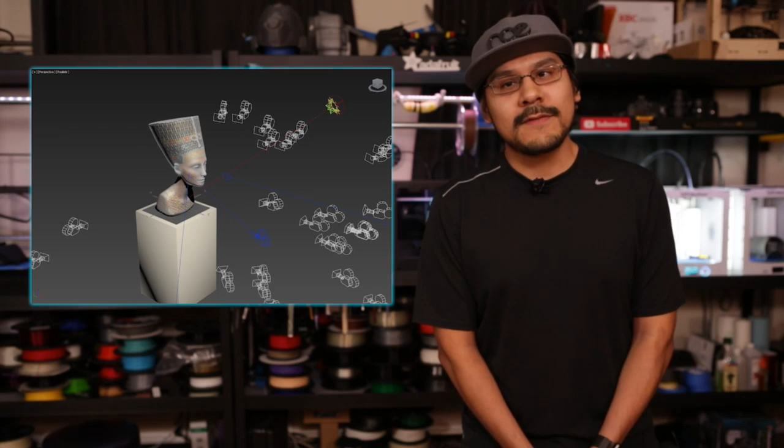So 2 artists secretly 3D scanned the bust and released the files to the public as a free download. Although museums have already scanned Nefertiti's bust, they don't plan to make it public, which seems kind of backwards because there are a lot of museums around the world hosting scan-a-thons, where they let people use their smartphones to take a bunch of pictures of objects to make 3D scans of them.

As a way of bringing her back to Egypt, the 2 artists 3D printed a 1-to-1 copy, which is like the most precise replica ever made. That bust now resides in the American University of Cairo. This is like pirate 3D printing, folks.

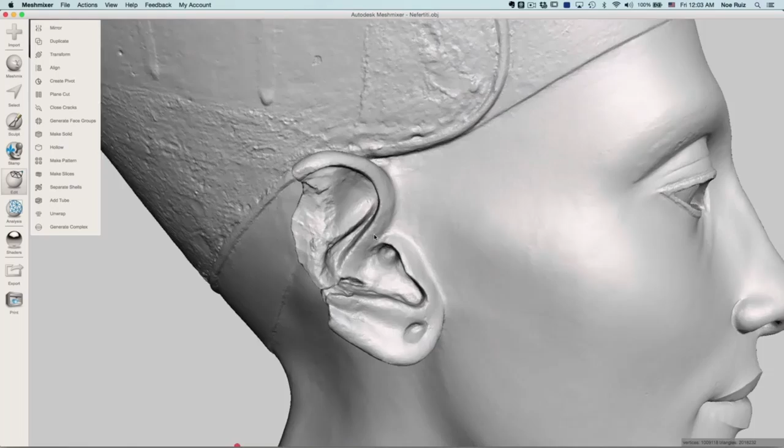So we thought we would download the file and 3D print it ourselves on our 3D printer. We're amazed just how much detail was captured in the model. Every little crack, chip, and scratch is fully visible, which is no surprise because the mesh has a whopping 2 million polygons. It's so detailed that if you throw it in your slicing software, it'll probably crash if you try to print it as is.

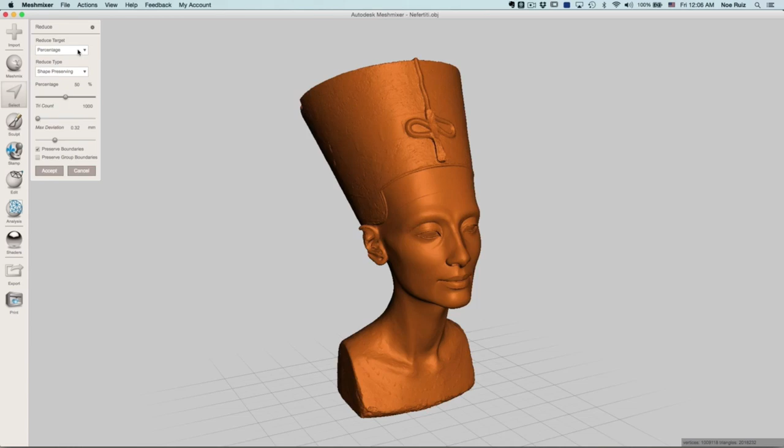So we used a program called Meshmixer, from Autodesk, and reduced the polygon count to 50% and did a little tweaking so it's better for printing on an FDM style 3D printer like we have here in the back. We chopped off the bottom so that it's completely flat, which makes it a lot easier to print, especially without a raft.

We also hollowed it out and cut off the top because we think it would make an epic planter. Plus it will save a lot on printing time and material, so that's always a good thing.

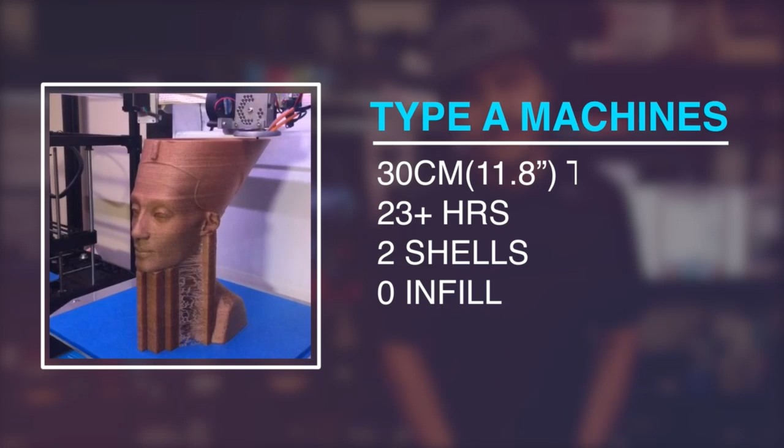So we used the Type A Machines Series 1 3D printer and scaled it to the max. That's a massive 30 centimeters tall. And even as a shell with no infill, it took over 23 hours to 3D print, which actually isn't a lot of time when you think about how long it took to get from Egypt to our studio here in South Florida.

And instead of using typical plastic like PLA or ABS, we actually used a PLA composite mixed with hemp. Yes, you heard it right, hemp, because why not? We're already 3D printing an illegal copy, you might as well go big or go home.

So here she is, fully finished in all her glory. We're just amazed how well it turned out. Really nice details, all the overhangs came out really well, which isn't really easy to do, especially with a large print. A lot of things can go wrong, like you can run out of filament, or the printer could crap out on you halfway through the print, and then you cry for lots of hours.

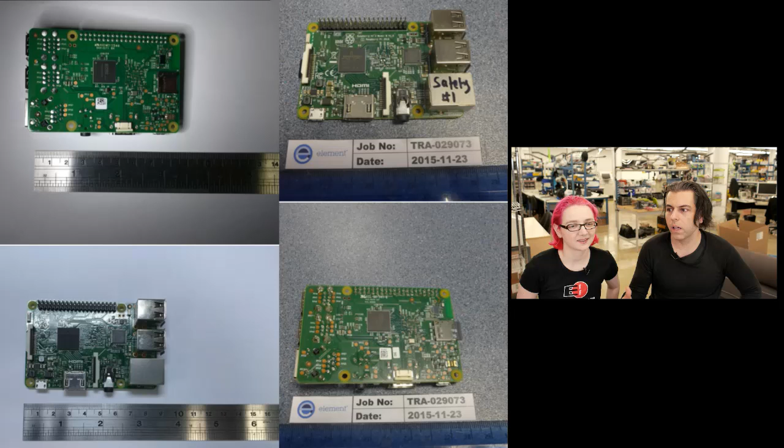There was the FCC document. There's this FCC Twitter account that tweets whatever was registered with FCC, so people were like, ooh, there's a new Raspberry Pi, and then you could follow the links. Because we had our shipment coming and we have a friendship with the Pi Foundation, normally if there were other types of leaks in the technology world, maybe we would cover it. But this one, we have an agreement, we trust each other, so we don't have an NDA or anything. We're actually just friends, we have a friend-DA. They said, hey, can you please let us do the launch the way we want to do it? We never ruin it for anyone. So there was a bunch of leaks that came out, and we just watched from the sidelines.

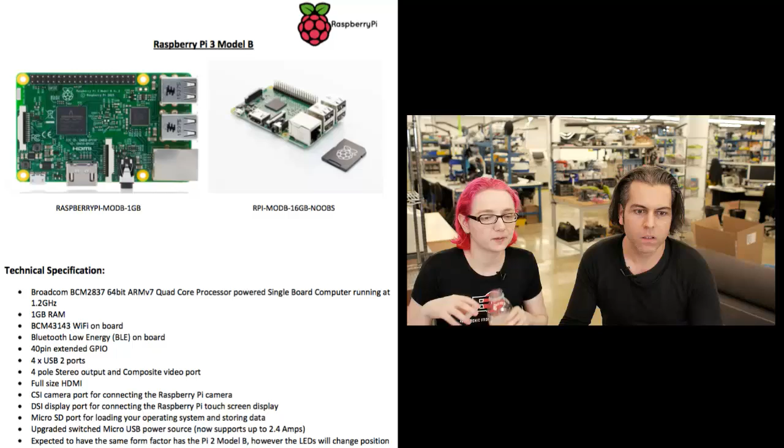And print catalogs, this was from CPC. They have to do things in advance, so the print catalogs hit some mailboxes. And then Farnell and RS both had leaked PDFs, because they have these big, massive e-com sites that have to have content management systems, with like thousands of people, and they're like, oh, I'll just do it the night before. So the first thing that came out was this Farnell PDF, and then that was removed. And then afterwards, this RS comparison PDF, and that was removed. And then a couple photos came out, and it's the Raspberry Pi 3.

And I guess, LADYADA, why don't you just quickly, before we get to new products, which is the Pi 3, tell us what were the big things about the Pi 3 that were interesting? The high level stuff is it's the same shape and size as the Raspberry Pi B Plus and Pi 2, so it's still got that Ethernet port, 4 USB ports, micro USB for power, micro SD card, HDMI, and AV port, but the chip has been updated.

So instead of a BCM 2836, it's the 2837. It's an ARM Core V8 processor. It runs a lot faster, has the same amount of RAM, but basically it's like 50% faster than the Pi 2, so it launches faster. It can run programs and emulate stuff a lot better. You do need to have a new SD card, but you can basically do all the stuff you did with the Pi, but just more. And it has built-in Bluetooth Classic, Bluetooth Low Energy, and Wi-Fi chipset, so you don't need an external dongle for those. It's baked right in, which is why there was an FCC filing.

Okay, so let's get to new products, and then we'll show the Pi 3, and there'll probably be a lot of questions.

Yeah, of course. So let's keep moving along.

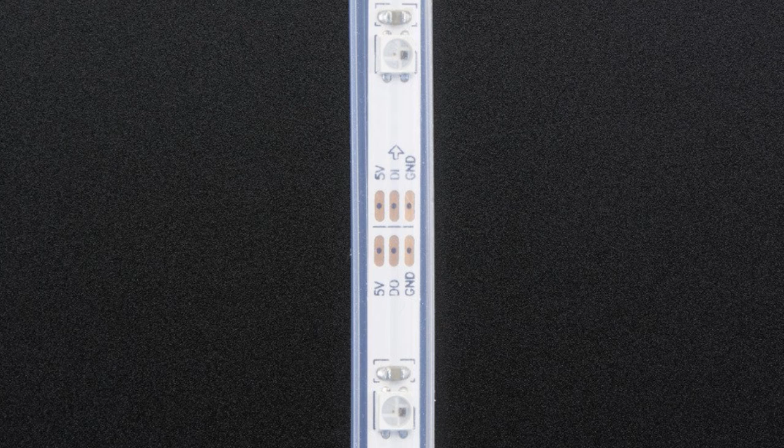These are particularly great for wearables. These are super skinny NeoPixels. If you've seen the mini NeoPixels we've had on the Feather NeoPixel wing, these are much thinner than normal NeoPixel strips. Instead of 5 by 5 millimeter or 3.5 by 3.5 millimeter NeoPixels, they're pretty much the same brightness. I didn't notice a significantly less bright effect. You still have the same code - they're code compatible, just much smaller.

And so the strips of LEDs are also much thinner. We have them at 30 LEDs per meter, and this is the 60 LED per meter. There's also 144 LED per meter, but it's not that much thinner because to get that density, the capacitor makes it a little thicker. So I'm not sure if I'm going to carry the 144s, but the 60 LEDs are much thinner, and I'll show them on the overhead as well.

Can you go to the next photo so I can show that? This is the other one - same basic thing, it's just black flex versus white flex.

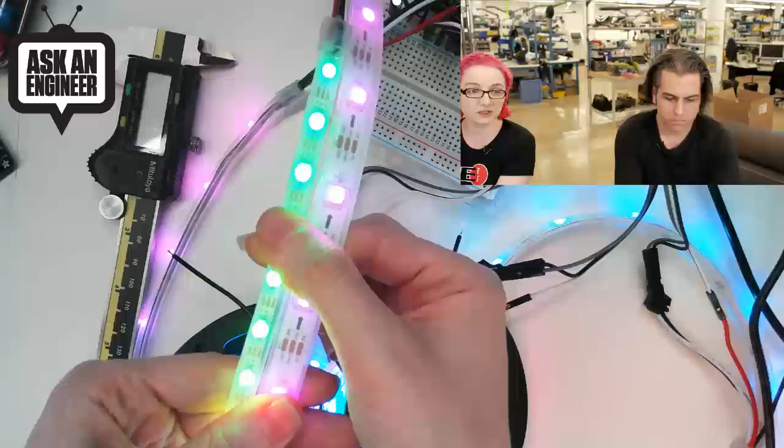Yeah, you can see it's a lot thinner compared to the normal NeoPixels. So this is really good for wearables. I think if you want a really slim effect, or if you want to fit it into some enclosure that's extra small - this is the skinny NeoPixel, and this is normal NeoPixel. So you can really see it's about half the thickness, half the width.

Grabbing my calipers, I'm measuring what's the flex PCB inside of the sheathing - these are really skinny, it's 5 millimeters, and then this one is about 10 millimeters. So it's about half the thickness. Most others actually also focus on being thinner too, but they just stick with 10 millimeter. For these, they really are just about as wide as the LEDs themselves, so only a little bit more - basically 5 millimeters, only a little bit wider than the 3.5.

Uses the same power, same protocol and everything, but just skinny. They're actually basically about the same price too. So if you want, for this it's perfect - I was thinking of doing a jacket with LEDs in it, and this is way better. You get half the thickness, basically the same density of pixels, but much more freedom and flexibility. If you're making an LED wig, these will be a lot lighter as well.

And remember, they have a weatherproof sheathing, but you can cut that off and just strip it to have the raw LED if you want maximum thinness. They're also a little thinner in this direction, but I don't remember the exact number - I think it's maybe 0.1 or 0.2 millimeters thinner, but they're skinny. I like that, it's cute. Yeah, a little tougher to solder too, but whatever.

Okay, and like I said, we have all these videos showing what they're doing - the different densities, 30 and 60 LED per meter. So sweet, and it's hard to tell, but there's black ones and white ones. Basically we just have both types, since people want half of one, half of the other, so we just carry both.

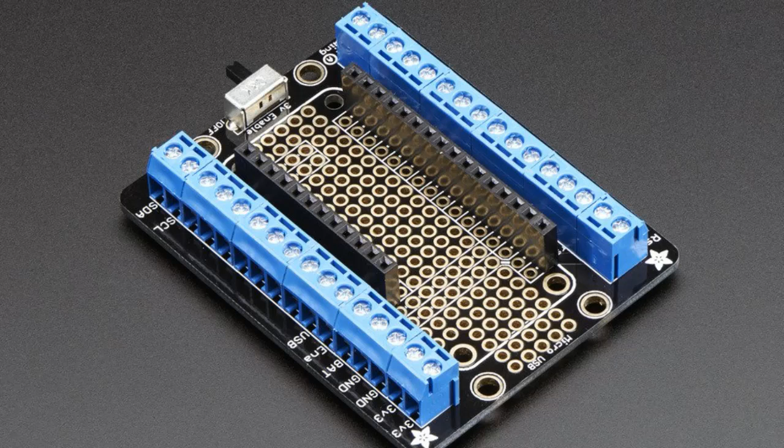Okay, next up - this is a feather accessory. I just love having a feather accessory every week, and this week's feather accessory is a terminal block wing.

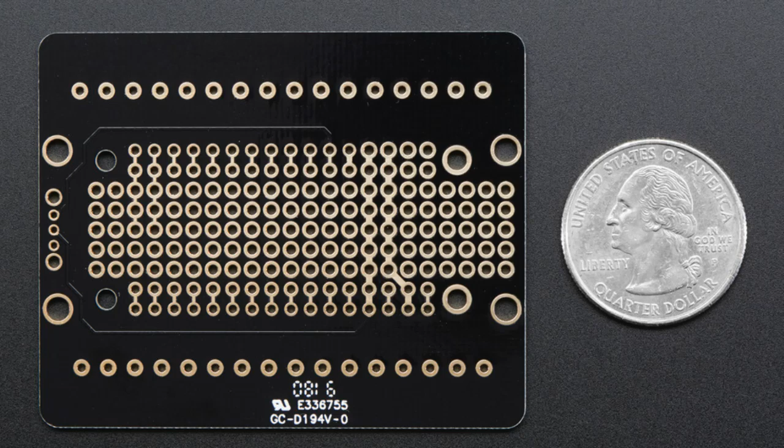So this is kind of like an underwing. It has a prototyping area, but more importantly, it has terminal blocks for everything. It comes as a kit you solder together, and when you're done you can plug in your feather, and then you have two big screw terminal strips on either side that break out all of the pins, and there's also an on-off switch, which I'll demo. It's just really handy.

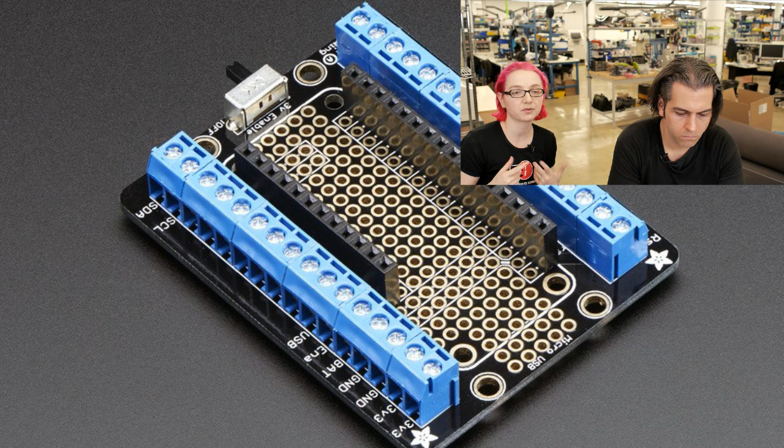People just love this stuff for wiring fast, either permanent or temporary connections. You can do either. If you have an installation and you want to have wires going to a motor controller or something else, and size isn't important, this is great. You get a little bit of prototyping area, all the terminal blocks, extra power and ground connections, and an on-off switch.

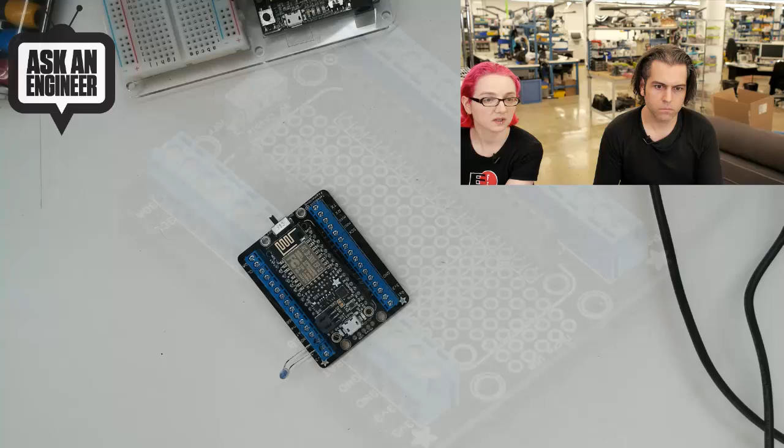So I thought I'd show this on the overhead. Okay. Oh, we lost overhead. You want to plug and unplug? See what you can do. I think we lost some overhead. That's okay, only right when you went over to it, which is kind of fascinating. It happens sometimes. I'm not sure exactly what's going on there. Can you do it again? Oh yeah. How many other things do you have on the overhead today? This is it, we have the Pi though. The Pi, yeah, if we can do it. But we also have really good photos of the Pi.

Well, if you can talk about it a little more while I do a couple things here. Sure. So it works with all of our feathers, the M0, 32U4, the Bluefruits, whatever. I just have a photo of it with the Huzzah. The only one it won't work so well with is the FONA feather. The reason why is the FONA module itself runs off of the battery rather than the 3.3 volts, so you just can't use that on-off switch, it won't actually work.

Plug in, plug in, unplug, replug. It's not cooperating tonight. Oh well. That's okay, whatever, it's pretty intuitive what's going on here. I got it. Okay, want to try? Yeah, I'll do it again.

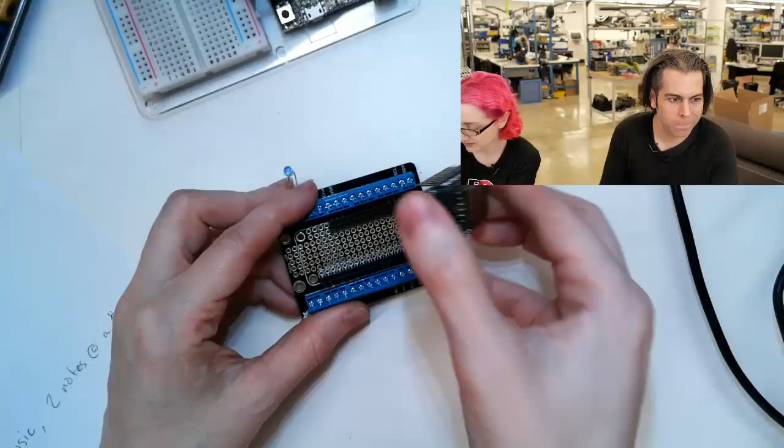Don't jinx it. Yeah, so this is it. I just have the Huzzah feather plugged into it. So you have terminal blocks, and then you have headers to plug in. You can solder it directly in, but this way you have space for the battery connector. I just have it with an LED connected.

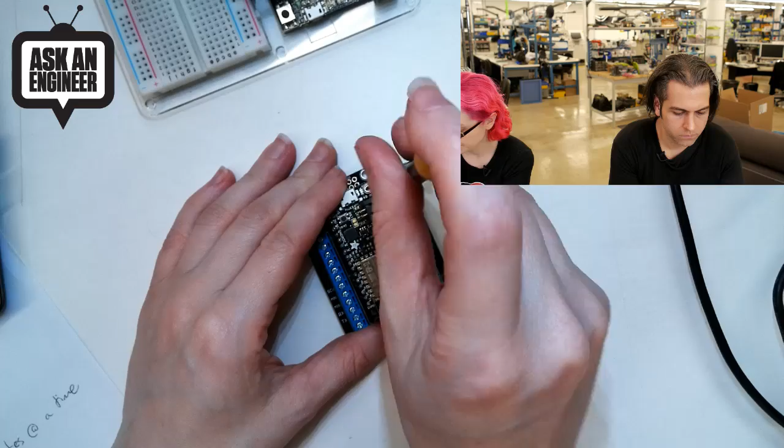So this is the screw terminals. They're pretty easy to use. You just use any Phillips head or flathead mini screwdriver, and then you can connect and disconnect stuff, like wires and components. You can use probably like 16 to 30 gauge wire, something like that, pretty much the most common wires that you'll need.

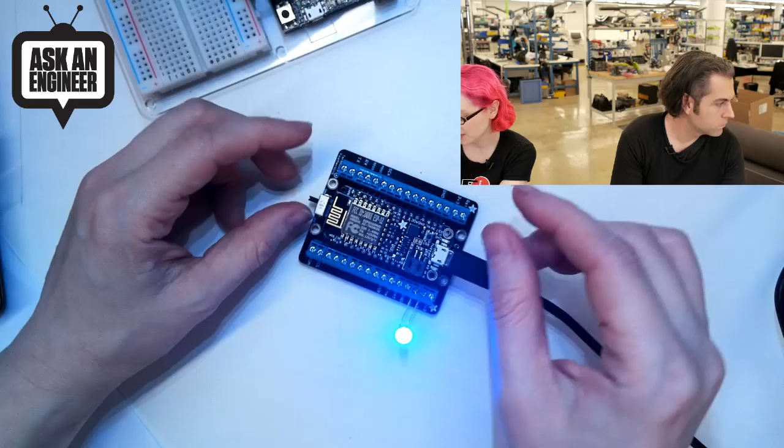And then you basically just plug into USB on your feather as normal, and then you can turn it on and off with this switch. I wasn't gonna add the switch, but I was like, you know what, that might be handy to actually have a mechanical switch on there. So it cuts power on and off to the feather. It can be handy if you're prototyping and you want to power cycle the whole setup.

So that's it, the terminal blocks is nice, it's really nice. This is one of the benefits of having the feather standard, because all of the feathers have the same pinouts. I don't have to worry about making one of these for the Bluetooth one, and one for the Fona, and one for the Ethernet, and one for the Wi-Fi. All of them are completely compatible, use whichever one you want. They will all fit, they all have the same core pinouts, and then the rest of the pins aren't labeled, you'll have to just look those up.

And getting to kind of the star of the show besides you tonight is the Pi. The Pi 3! Wow, so the Pi 3's here. We have a few photos of the Pi 3, and this is the Internet of Things Pi, is what I'm going to say. Yeah, this is the Internet of Things Pi.

So the Pi 3, I just got my hands on one like 2 hours ago. So really, all I did was, we'll do a live unboxing. Here you go, so let's unbox it.

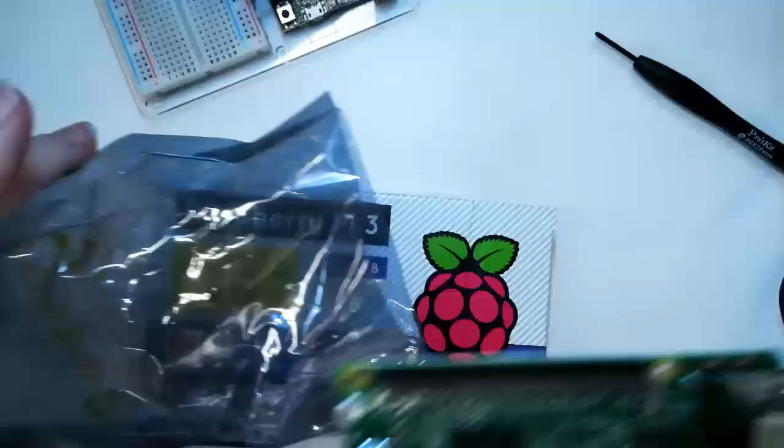So it was okay, it was in this, and then I took it out. So this is the Pi 3, and it comes with a much thinner compliance thing, and they figured out a way to print it all on one piece of paper rather than a booklet. So it's kind of nice.

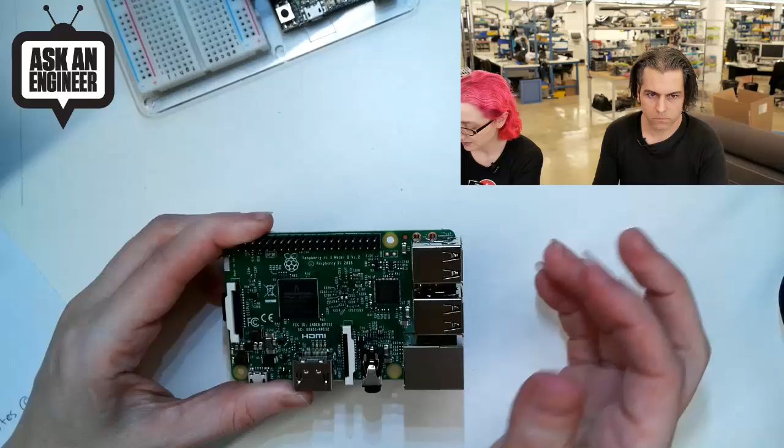So the Pi 3 looks just like the Pi 2, but it has a BCM2837. It's an ARM Cortex V8, a 64-bit processor, but like all the ARM Cortex, it's backward compatible. So you can run code that's compiled for the V7 on this. So if Pi 2 code or B plus code that's compiled on Pi 2 or B plus, you can still run it on this processor.

You do need a new kernel because it has firmware to boot it up, but if you have the latest noobs, that works. I've noticed that the Raspbian that was released a couple days ago didn't work. They're probably going to update that in the next couple days, so just hold off on that, or just use noobs.

Other things that changed is the SD card is no longer push-push, it's now push-pull, which is actually kind of nice because I kept having these fly out, you'd bump them and it would fly out. I didn't like that.

Still has 1 gig of RAM on the bottom, still has 4 USB ports, still has Ethernet 10/100, still has the LAN9514 from SMSC, so it's a USB hub and Ethernet, which is lovely. Still has HDMI, camera, and display.

Has a slightly better power supply. Apparently, I haven't looked at what the chip is, but the power supply can now do 2.5 amps.

We're gonna take one home, and we have this power monitor thing that KTOWN made. It's called Power Monitor, and we're going to run it through it. I'm going to measure the actual power draw during boot and stuff, which I did with the Pi 2 and the Pi 0. So I'm going to do that with the Pi 3.

Note that although there's warnings about like, oh, you need 2.5 amps of current, that's only if you have a ton of stuff plugged in, like external hard disk and Ethernet running at full blast, all these accessories, and you're powering a display off of it or something. As is, it only uses about 700 milliamps. So as long as you're using a power supply, if you just want to run this minimally, as long as you have a 1 to 2 amp power supply, you're good to go.

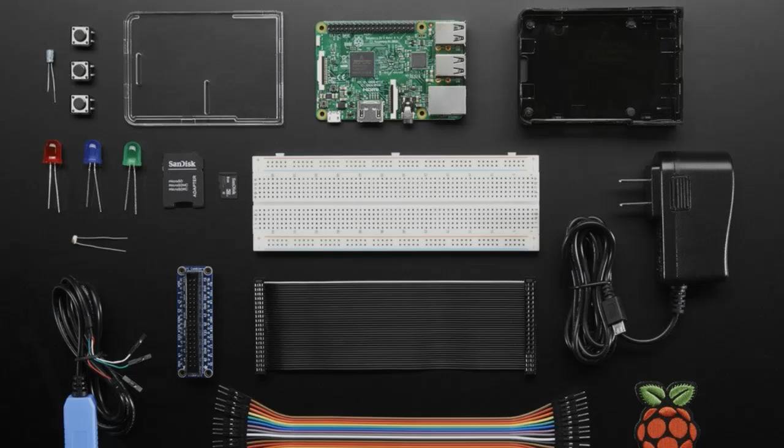The $35 supercomputer, so that's the Pi 3 itself. There is something else - this is mine, I only have one for myself, I usually grab a couple. We do have some packs that we're putting together now. We have the starter kits. This is the starter kit that we normally have, except it doesn't include the Wi-Fi module because, of course, you don't need that anymore, it's built in, so that's great. So you do get a larger SD card, and you get a Pi 3, but you don't have to have an external USB Wi-Fi dongle. So that's kind of handy. And we have a couple of those packs as well if you want an all-in-one starter kit.

Okay, so yeah, that is your parts, LADYADA. Yay, you did it. Yep, so it's kind of fun. We had a little bit of Feather, a little bit of NeoPixel, a little bit of Pi. Okay, yeah, the pies just came in, so it's exciting.